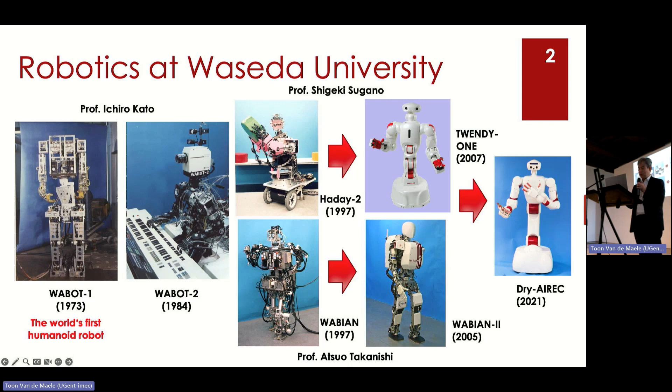And I was interested in neural networks. Then my supervisor, Ichiro Kato, told me to focus not just on intelligence, but more on emotional aspects, finally leading to consciousness or mind or something. So I have continued that work for these 30 years.

So deep learning, okay. I work on neural networks, but now everyone calls neural networks deep learning, so here I changed the name to deep learning. As you know, deep learning shows very great performance in image processing, speech, language, many different types of modalities. They can be handled by deep learning models. But at the same time, we know that deep learning still has problems if we want to apply it to real hardware. We find some difficulties.

And Sam Altman, OpenAI's CEO, mentioned that blue-collar workers come last. That means for white-collar workers, ChatGPT seems to become a big breakthrough. But the tasks of blue-collar workers are still very hard. So I think that kind of direction could be connected to the next AI.

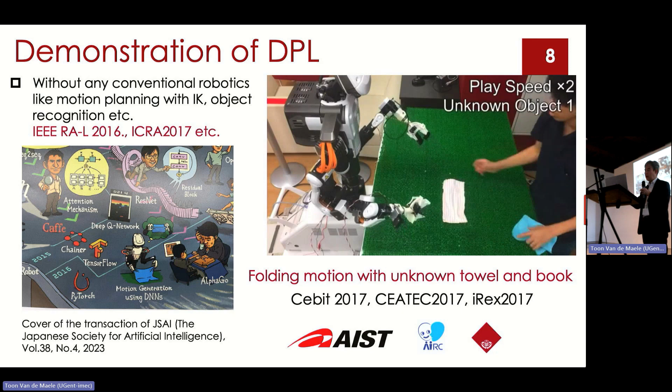And for example, this towel is unknown. That means it was not used for the training. So in this case, the robot actually generated his cognitive state. In that case, the towel is of course predicted, but the color is completely different. So for him, this kind of cognitive state is enough to generate the motions.

And now we put the book, but now he predicted the towels due to his strong prediction priors. But it can hold it with no problems. So now this robot has very strong priors, always trying to hold everything in front of it. So if the students forget to put on the towels, the robot tries to hold the desk. Okay, so such kind of strong prediction keeps generating these kinds of motions.

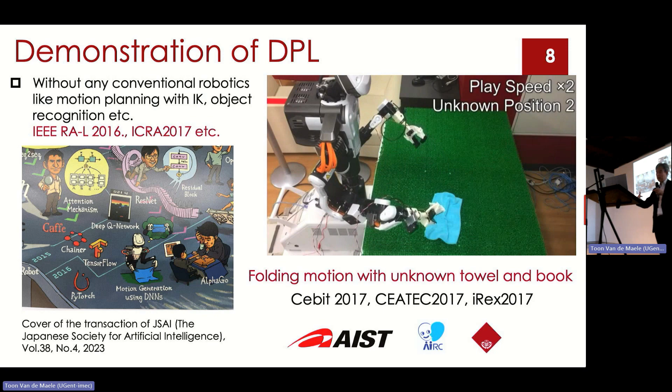types of untrained situations. But in real actual situations, with physical bodies, the agent can adapt to the real world by changing the cognitive state and also motion. So by changing the trajectory to reduce the prediction error. This kind of idea is very interesting.

And so in this sense, we can say something a little bit different between the reinforcement learning approach and active inference, I think. So actually, reinforcement learning, as you know, is sometimes model-based, sometimes model-free, but anyway, they all try to optimize the model. So this kind of idea, sorry.

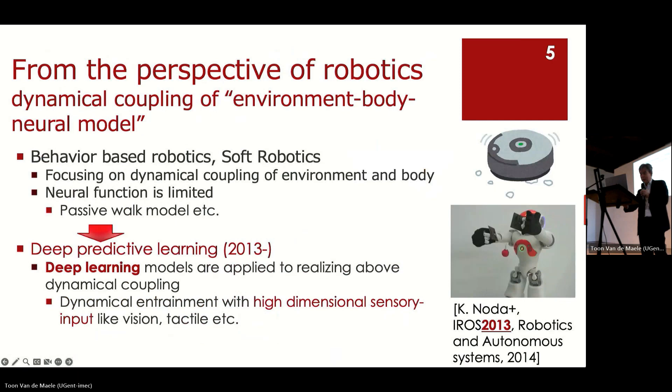So combining the autoencoder and recurrent neural network is also a proposal in the context of reinforcement learning, and it's called world models. But this world model usually tries to be as perfect as possible. Then once they obtain the perfect world model, they try to find the best policy to obtain the maximum reward, searched with trial and error.

But in the case of active inference, we know that the world model is always incomplete, not perfect. It always has some kind of error, prediction errors. So the agent has to dynamically adapt, in real time, to such an error by changing the internal state and behaviors.

So in that case, we cannot say this motion is the optimal motion. In the other case, once a perfect world model is obtained, the selected motion can be said to be the perfect, optimal, best motion in this world model. But in this case, the behavior is really influenced by the experience. Once it obtained this kind of manner, the robot always tries to hold everything.

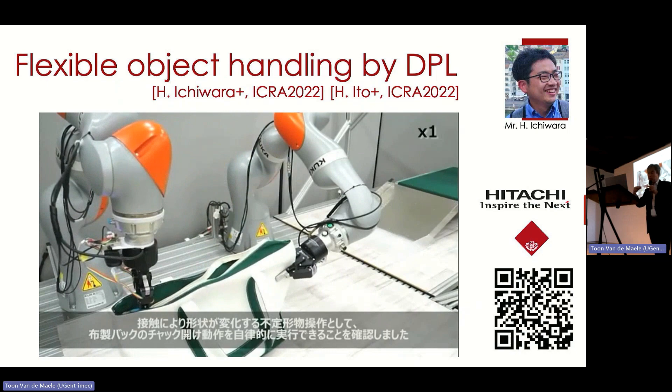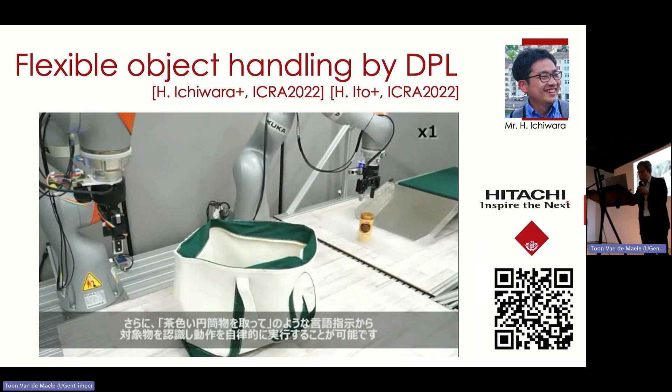So from now, I show some demonstrations. One of them is opening a zipper. This is one of the very difficult tasks for robot systems, because starting from grasping the zipper, the handling conditions could always change, and according to the change of the torque, the robot needs to change its trajectory, not just change the torque. That kind of sense is very important. But everything is done to reduce the prediction error.

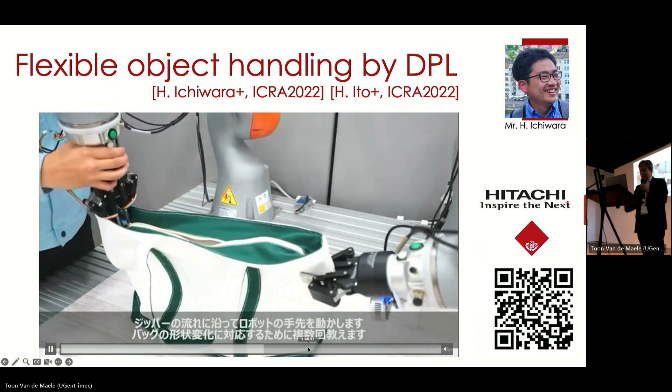So teaching is like this. In this case, we just use 36 teaching data. That's enough. And after that, this is a scene of opening the zipper. This is a captured image, and this is a predicted image. And this red point is an attentional point.

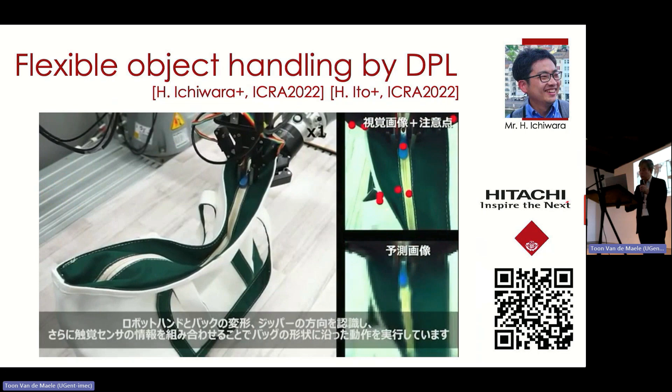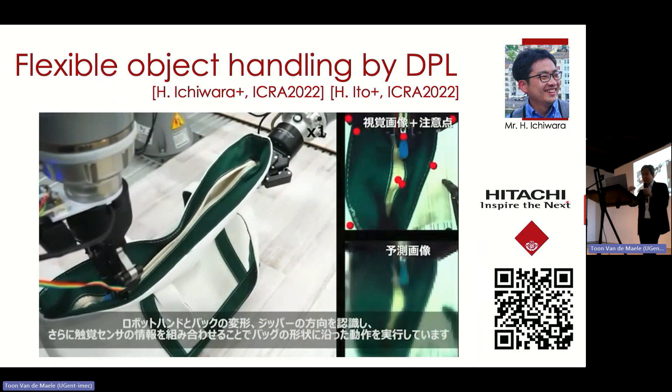This is a very interesting demonstration. Now he seems to be a little bit confused. And so he changes the trajectory with trial and error and finally opens it. So this kind of motion is automatically generated. And again, back to these attentions.

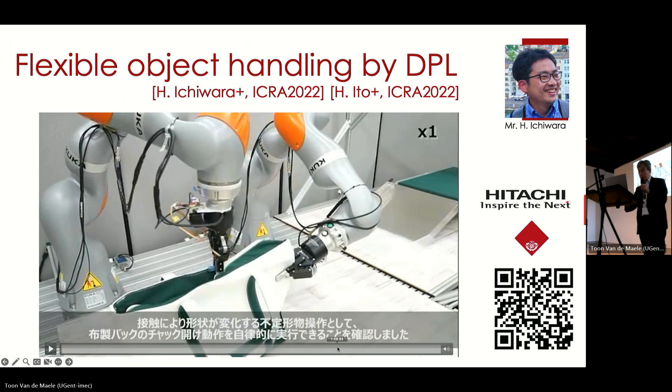So for example, I don't have enough time to explain it all, but the target is how to reduce the prediction error of the whole cognitive state. It includes the image, the tactile senses and the motions. So it is propagated and trained through these networks, but the networks are trained to select some high precision points. These points are trained to reduce the overall prediction error. That, I think, is connected to the idea of sensory precision.

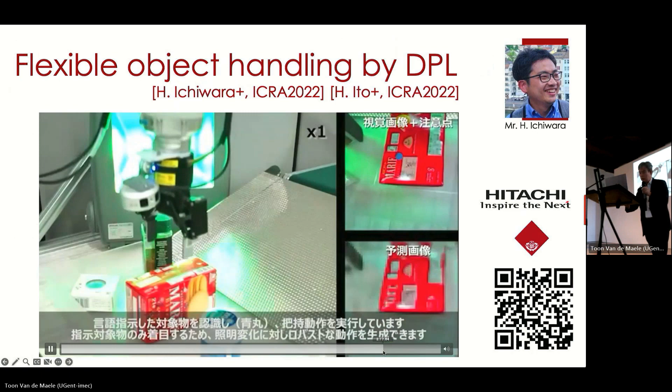And sorry, let me continue this movie. So this is another example. Even when the lighting condition changes, it can adapt and continue the work. And this is a very symbolic scene. Here, the robot can adapt to the change of the position of the object.

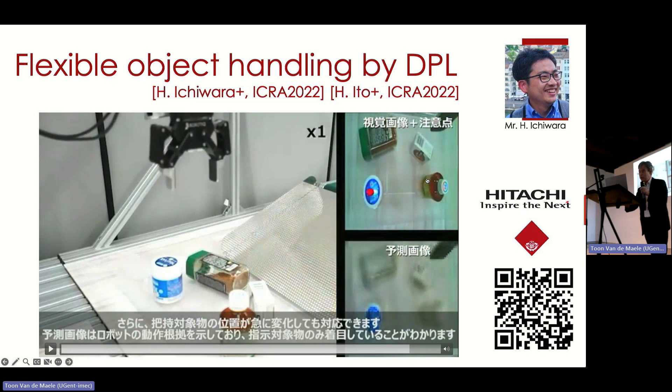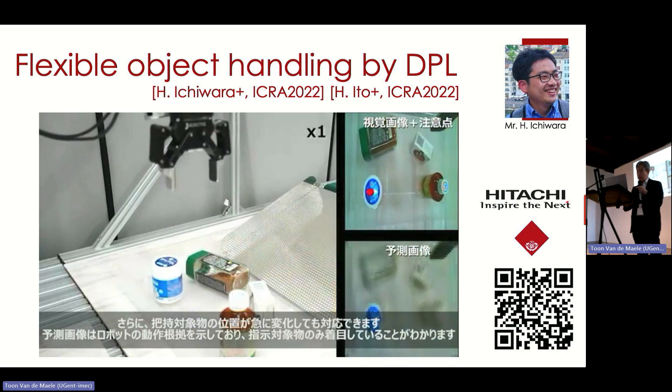This one is the real camera image, and this is its generated cognitive state. And you can see that to reduce the prediction error, in its cognitive state the other object has now disappeared. So by adapting the internal latent state, which we can see as an image of the latent space, the robot can adapt and continue the work in this kind of task.

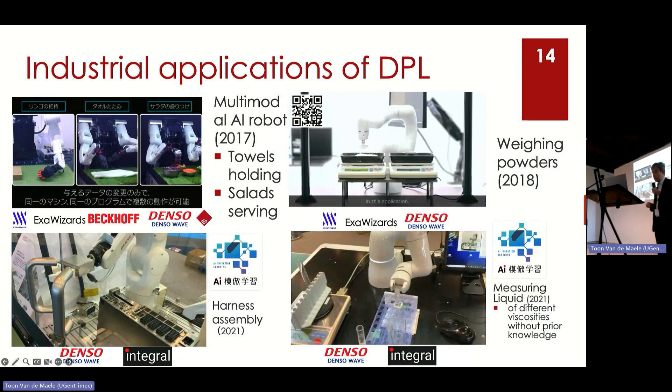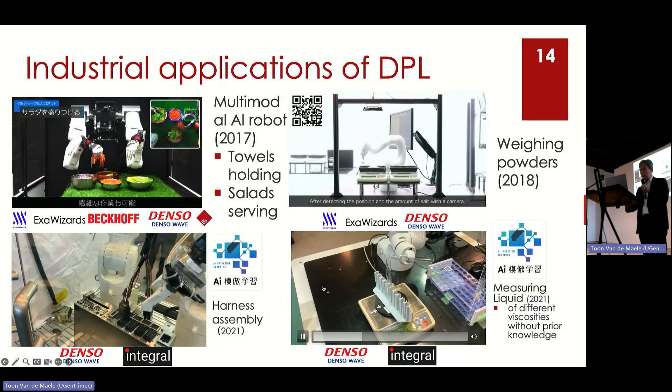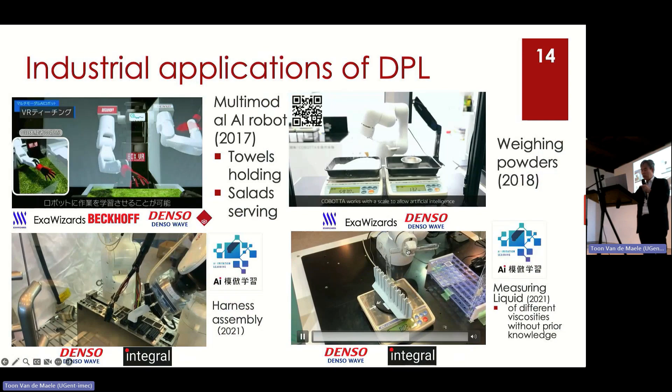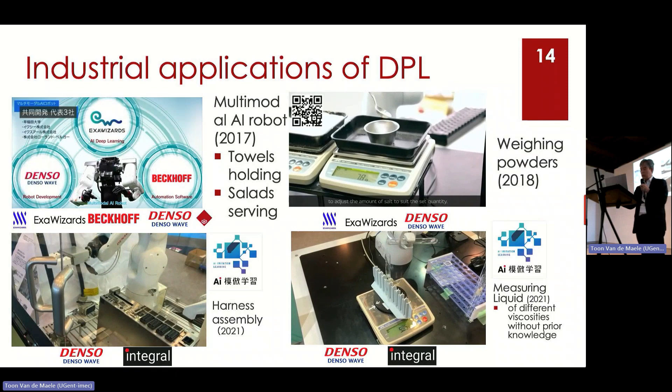And we have already started collaborating with some industrial companies in Japan on this idea. Some of them showed a demonstration 6 years ago, and some of it was already released as a product 2 years ago. The target is materials with very complex physical characteristics, like how to measure powder, or how to measure liquid with viscosity. This kind of target is a little bit hard to model, but by using such predictive learning models, the robot can handle it. And this is the product.

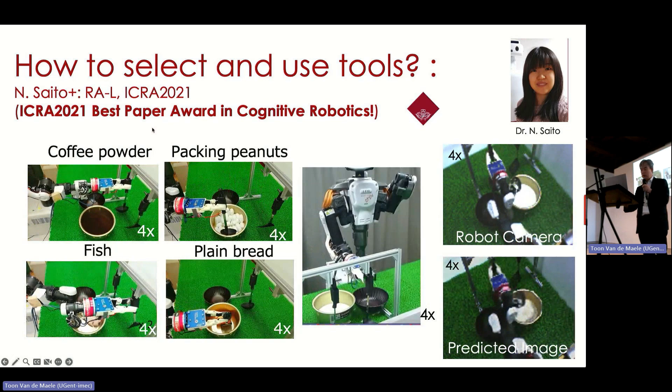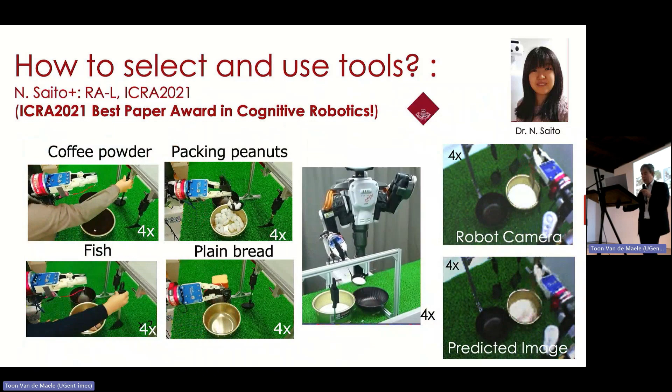And this one also won the ICRA best paper award 2 years ago. This one is about handling these kinds of food. Interestingly, this robot first tries to actively, physically interact with the material to recognize the object's characteristics, and after that the robot can select the tool and pour it. The pouring motion itself is very difficult. But by always predicting the future state, the internal latent space is determined, and then the motion can be generated. This is a trained object, and this is an untrained object.

Deep learning is always said to be a black box. Actually, some parts are a black box, but we can analyze it to some level. For example, in this case, we can analyze the activity of the recurrent neural networks after the touching. By applying principal component analysis, we found these spaces. After active cognition, each object clusters like this. And there are also boundaries for which tools should be selected. And if we put in an untrained object, each object seems to be separated correctly.

So the object is recognized not by vision, not from just one image, but through interaction. By predicting dynamics as a cognitive experience, the object is determined and recognized. This is a comparison of which type of information is required. Finally, we found that the image, the force, tactile, every information is important.

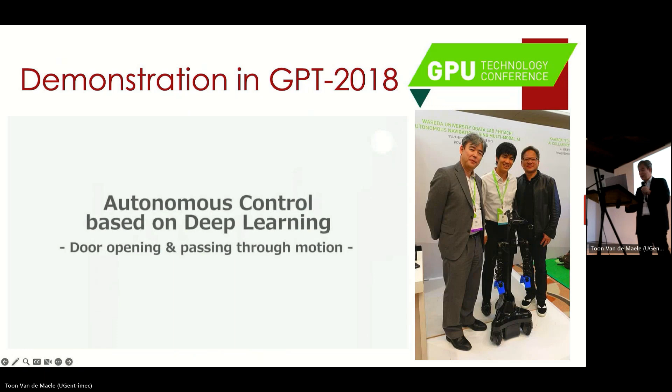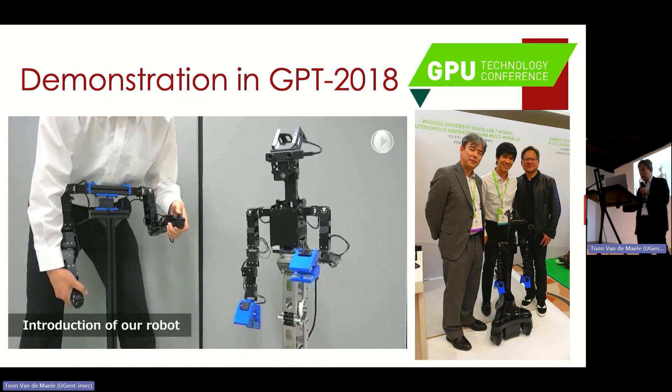And another one is door opening. Maybe the next movie might be good. Maybe some of you know him, Jensen Huang, the CEO of NVIDIA. We demonstrated this robot 5 years ago, in 2018, but the paper was published 2 years ago. It took 3 years. Anyway, Science Robotics is one of the top journals in the robotics area.

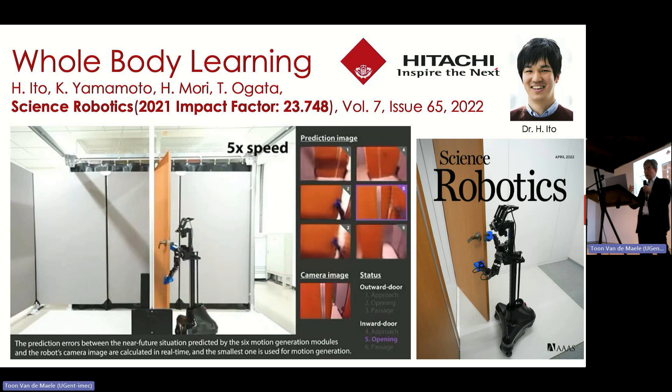And you can see now our model enables control of the whole body. Robot whole-body control. Even the vehicle control, every motor is controlled by our predictive model. No conventional robot systems. So you can see very stable motions, even when pushing and pulling.

So even with human interruption like this, the system always tries to reduce the expected error of the predicted conditions, so the robot can continue this kind of motion.

Yes, this work was selected for the cover of this issue.

In this case we use multiple prediction models—actually six prediction models for approaching the door, opening the door, passing the door, and the opposite side. Each module tries to predict the future state, and the module with the minimum prediction error is selected as the controller for the whole body.

So far this is just an application. I hope you can feel some potential of this predictive model to enhance robot abilities in the future, but the current models we used only address this part: how to reduce the prediction error.

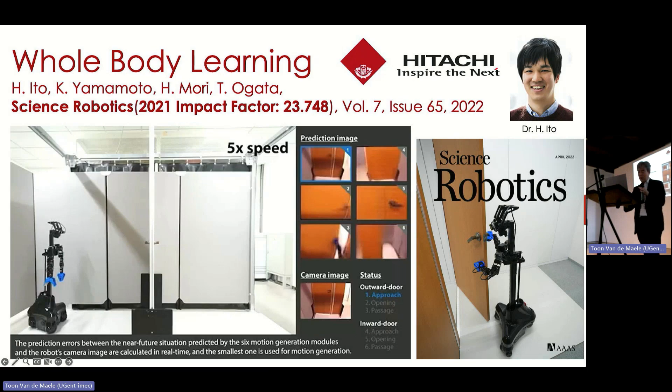This is some kind of trial and error motion. That requires a second term for how precise your prior is. In that sense, we should apply this kind of network model to future robot systems, but it's still hard, as I said, because it requires huge computational costs.

With these versions, some of my colleagues are now trying to improve the models.

I'd like to use a little time at the end of my talk to introduce this project - this is a very good opportunity. I'd like to enhance our AI robot system into a more general purpose robot system.

There is a big project supported by the Japanese Cabinet Office called Moonshot. Moonshot comes from the Apollo rocket project in the United States, where the president said we will take humans to the moon by the end of the 60s. We prepared such goals, nine in total. Goals 1 and 3 relate to AI robotics, and we are now joining goal 3, trying to develop smart robots.

As I mentioned, Sam Altman talked about the Moravec paradox as one of the biggest problems. Current deep learning models, which require huge amounts of data, are not suitable for developing these kinds of robots. I believe our techniques, referring to the idea of active inference, might be a very good approach to develop this kind of robot.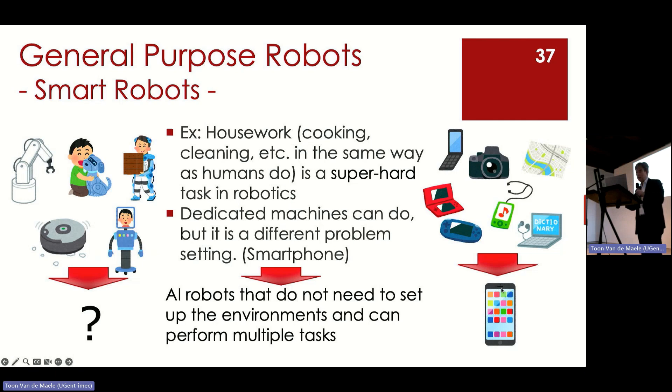There are many different types of robots targeting completely different tasks, but I believe they could be merged into a more general purpose robot, like a smartphone. There have been many devices so far, but finally they were packed into one device, which can then serve new kinds of values.

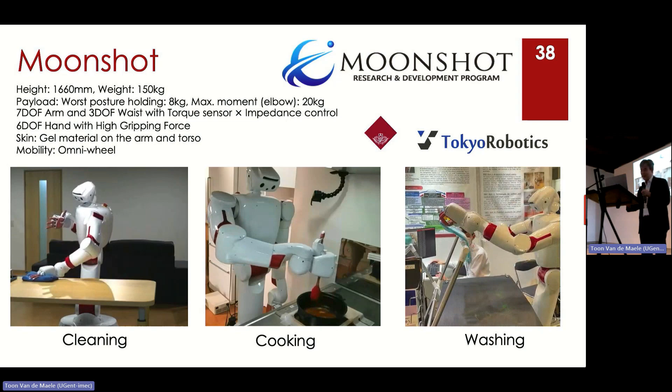This is a robot we developed using our models, for cleaning, cooking, and washing. We investigated requirements across many countries with questionnaires, and found these tasks are needed in every country. This motion is generated by our predictive learning models.

I'd like to show you an interesting example: cooking a scrambled egg. This is one of the difficult targets because during cooking, the condition of the egg changes - first it's completely liquid, but then it becomes solid. So the robot needs to recognize the change in the target's condition and change its strategy.

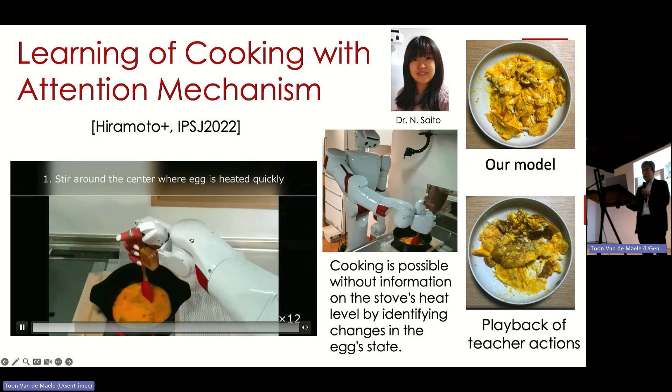Firstly, it mainly focused on vision, but during the cooking process, attention moved more to tactile and torque sensing. At first I said it's okay to just start randomly in the same manner, but if we do that, the result is like this - we cannot eat it. By changing the strategy to recognize object dynamics, the robot can cook correctly.

Maybe I still have time, but this is almost the end of my talk.

We now release open source software for our predictive models, which includes attention mechanisms. If you're interested, please use it, or give us comments to improve our models from the viewpoint of active inference research.

Sorry that my time control wasn't so correct, but that's most of my talk. Thank you very much.